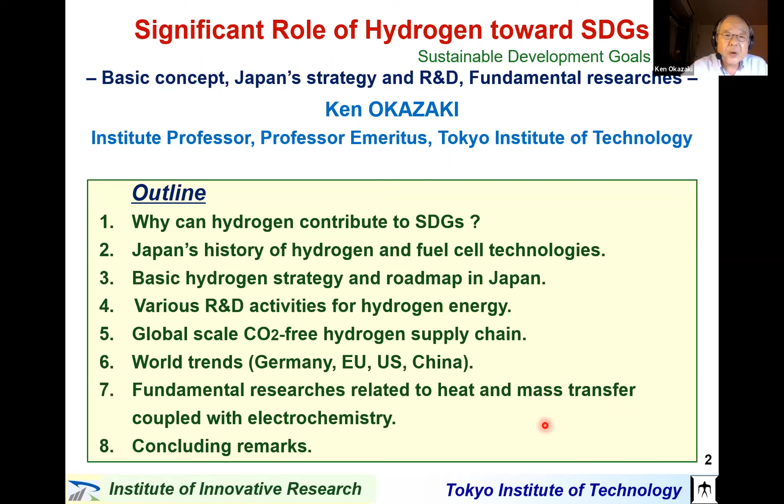Hydrogen is secondary energy and can be produced from various different kinds of energy resources, including domestic fuels, overseas unused energy, and renewable energies. Especially renewable energy is the most important to produce hydrogen in the future. Hydrogen is transported to the demand side and used to realize CO2-free industry and CO2-free mobility.

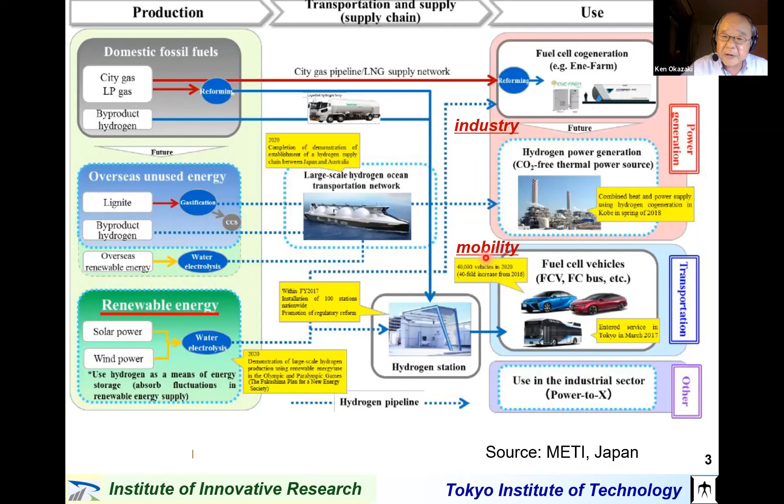This slide shows the situation of renewable energy in Japan. At present, the percentage of renewable energy is only 12% in Japan, but we have to increase this percentage to 22-24% by 2030, including solar power, wind power, biomass, and geothermal. Especially in Japan, solar power, PV, will play a very important role.

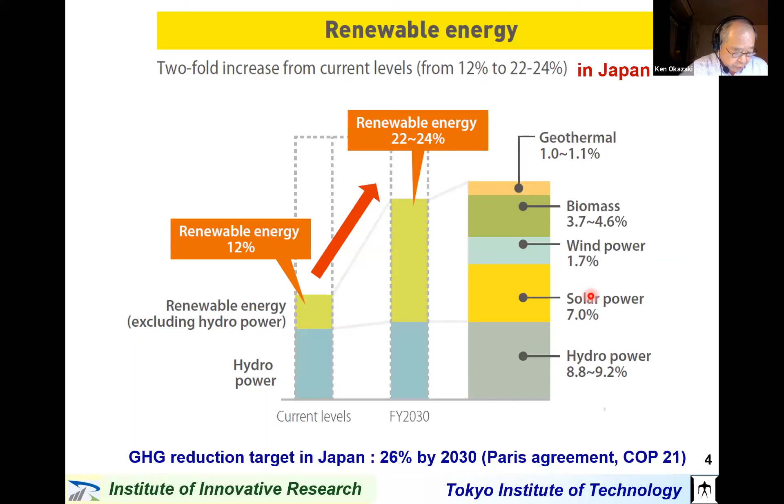Here we discuss why hydrogen now. Because of clean energy, flexible energy carrier, and long experience in hydrogen development in Japan. But when we discuss energy security and global environment, hydrogen should have a large, massive contribution.

Another importance of hydrogen is that it can enhance the introduction of more and more renewable energies, because renewable energy, especially natural energy, has very large fluctuations from seconds, minutes, hours to seasons. So for load leveling, hydrogen will play a very important role.

Another case is large electricity production above demand. In this case, hydrogen can store much amount of energy for the long term. Batteries may have the same role, but energy storage capacity and duration time are much smaller than hydrogen, as shown in the next slide.

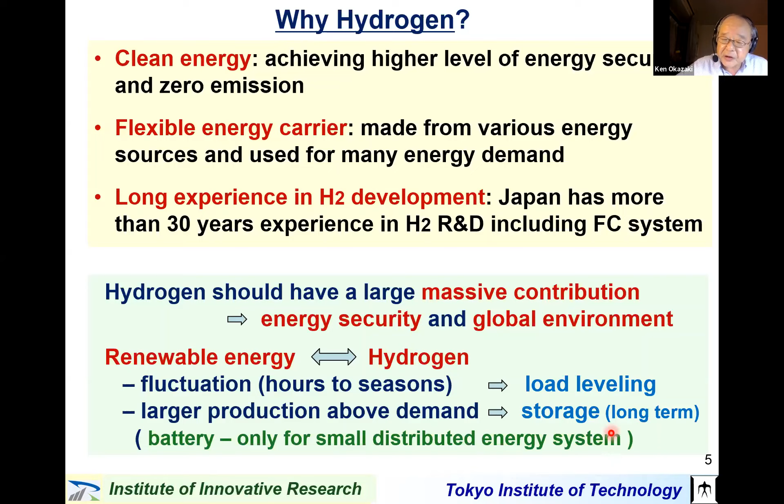As shown here, hydrogen has a very large capacity corresponding to 1 gigawatt and can store energy for a long time corresponding to minutes, hours, days, weeks, and even seasons. So hydrogen will play a very important role when we introduce more and more fluctuating renewable energies.

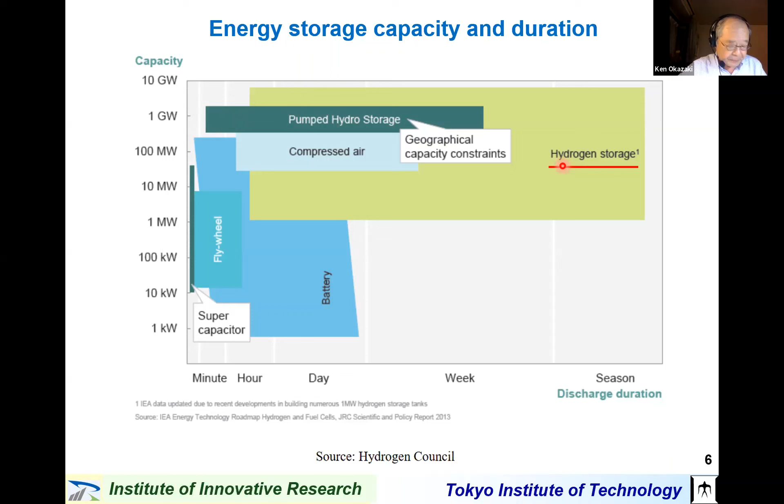Here I'll mention Japan's history of R&D in hydrogen and fuel cell technologies. We have more than 30 years of experience in hydrogen and fuel cell technologies.

In 2009, we introduced the household fuel cell, PEFC, and in 2011, the household fuel cell, SOFC. In 2013, we introduced hydrogen refueling stations and dissemination of hydrogen stations. As you know well, the actual commercialized fuel cell vehicle sales started in 2014. And now the global hydrogen supply chain and hydrogen power generation are ongoing, including various demonstrations as explained later.

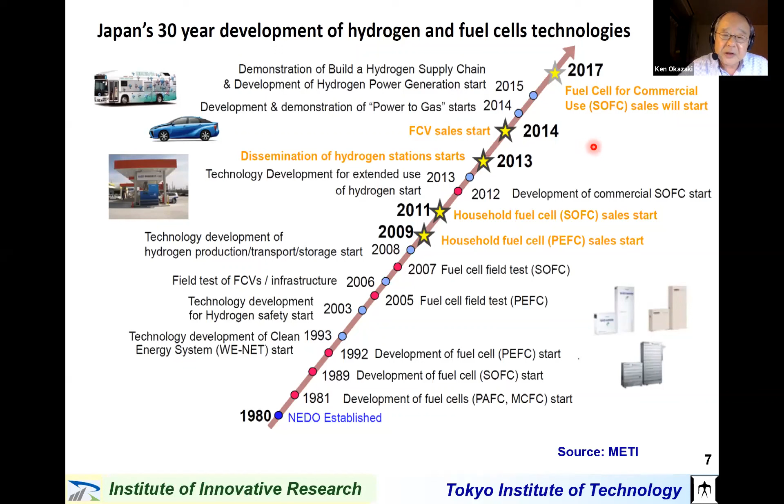As for national strategies, the basic hydrogen strategy was established about 2.5 years ago, in December 2017, declared by the Prime Minister.

Among them, hydrogen cost is the most important. The target shown here is $3 per kilogram hydrogen by 2030, down to $2 per kilogram hydrogen by 2050. To realize that, large-scale hydrogen supply chains and massive usage of hydrogen in mobility, power generation, and industry in general are needed.

Key technologies to be developed are shown here. In production, the electrolyzer system is quite important, and for transportation, which kind of energy carrier should be used matters. In the utilization part, on the demand side, fuel cells for mobility and power generation, and hydrogen-fired power generation will be quite important in the future.

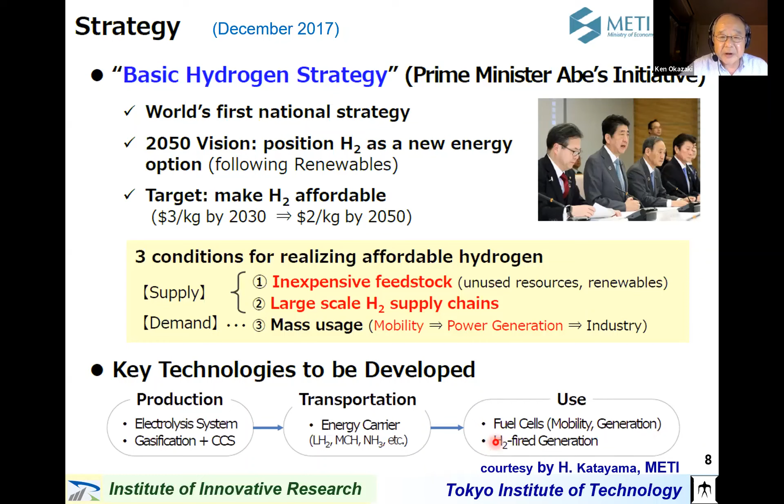This is the scenario for the basic hydrogen strategy. As for hydrogen volume, this is the present picture, and this is the target by 2030. The target for hydrogen volume in 2030 is about 300,000 tons per year, and the cost should be $3 per kilogram hydrogen. The power generation cost should be 17 Japanese yen per kilowatt hour, which corresponds to 15 cents per kilowatt hour. For mobility, 900 hydrogen stations should be introduced, and 800,000 fuel cell vehicles should be introduced.

800,000 fuel cell vehicles should be introduced, and utilization of fuel cells for households in private houses should be 5 million units by 2030. So we are now going on to realize such a target.

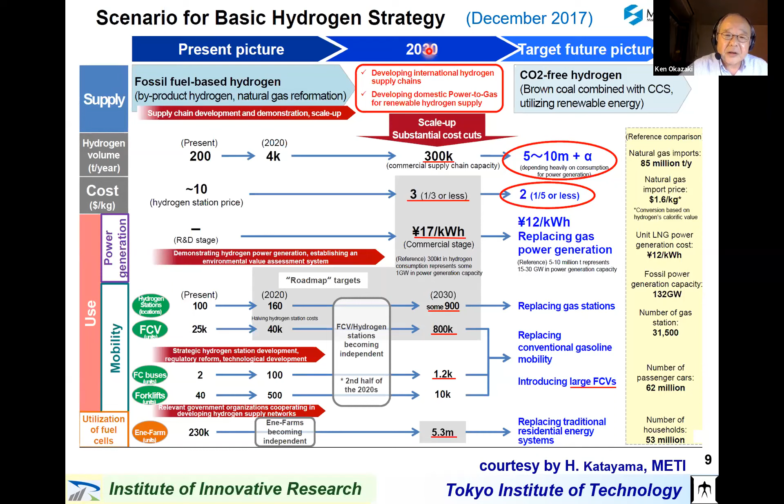By the way, what is the definition of hydrogen society? I myself said about 3 or 4 years ago: it is a society where hydrogen used as a secondary energy accounts for over 20% of all energy consumption, including industrial applications, and hydrogen quantitatively and sufficiently contributes to energy security and a carbon neutral society. These are the two major issues to realize such a hydrogen society.

One is the drastic expansion of demand, including fuel cell vehicles, residential fuel cell cogeneration units, and hydrogen electrical power generation. And for that demand, we have to realize the supply chain for a large amount of hydrogen. One is CO2-free hydrogen derived from domestic renewable energies through P2G, and also CO2-free hydrogen from unused energy from overseas. So increase of demand and supply, both are quite important.

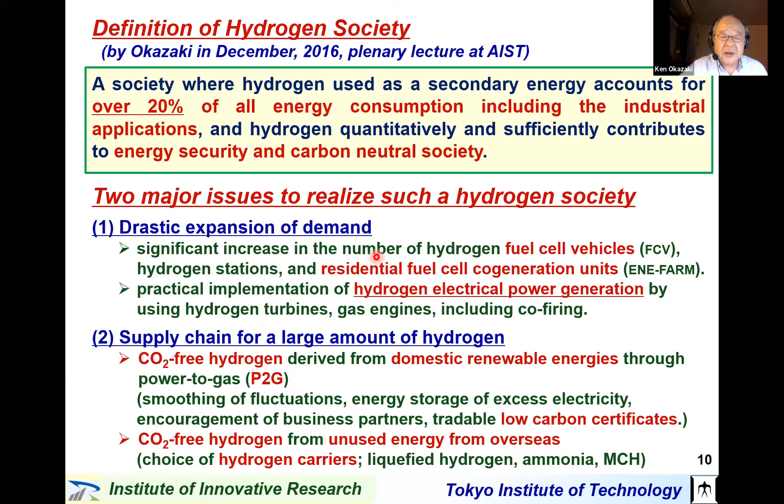This 20% value was supported by the Hydrogen Council, following my proposal.

Maybe all of you know well, but I'll show briefly the principle of the fuel cell like this. This is a membrane, and this is the fuel cell, and this is MEA, membrane electrode assembly, and fuel cell stack. More than 300 fuel cell MEA gathered in one stack will be packed in the fuel cell stack and installed in the car.

This is a high pressure hydrogen tank. Pressure is 70 megapascal, corresponding to 700 atmospheric pressure. Such a high pressure hydrogen tank is just below the rear seat.

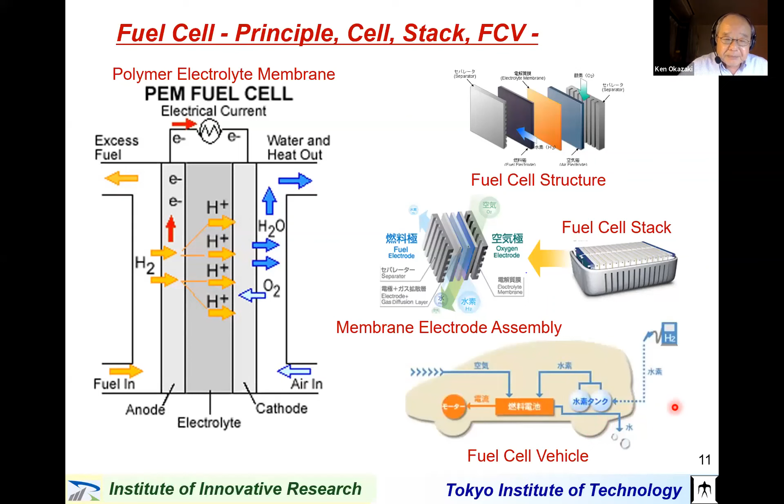Many people may be interested in the comparison between battery EV and FC EV, and between hybrid EV and plug-in hybrid EV here. FCV, fuel cell vehicle, has an advantage especially for large vehicles, including buses and trucks, considering cruising distance and charging time. For the fuel cell vehicle, hydrogen refueling time is only 3 minutes. Much longer time is necessary for the charging of battery EV.

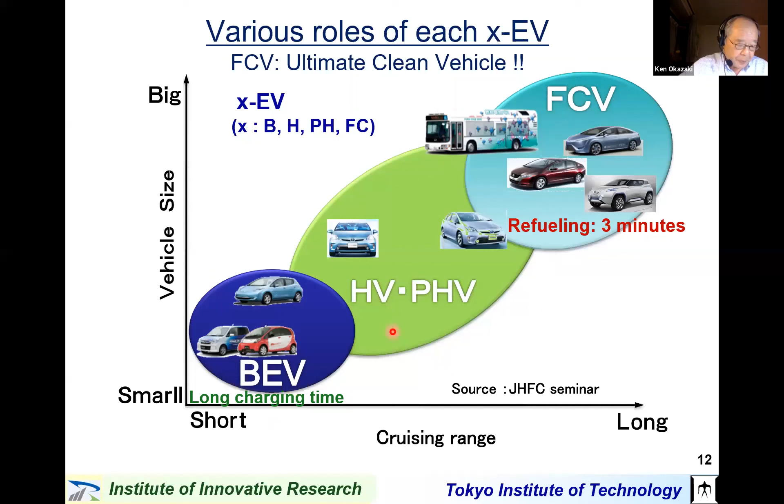This slide shows the status and target of fuel cell vehicles in Japan. I already explained the target of introducing fuel cell vehicles is 800,000 by 2030. By 2020, we tried to introduce 40,000 fuel cell vehicles, but actually, can you guess? Actually, only 10,000 fuel cell vehicles were introduced, behind our target. Fuel cell buses are also introduced into public services.

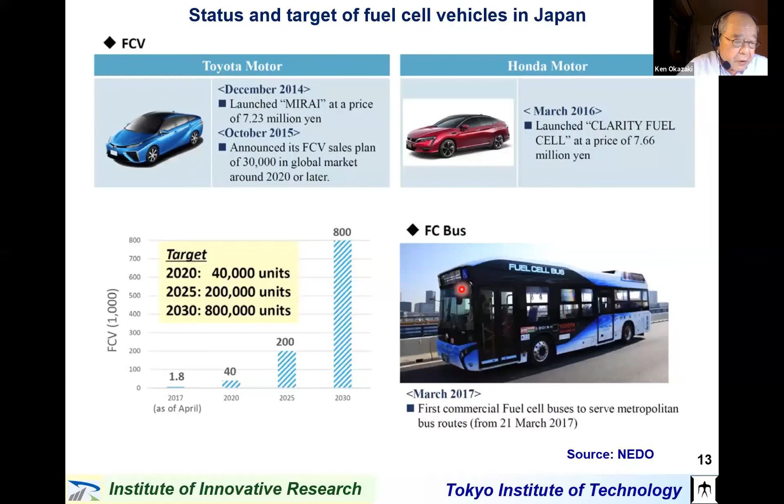Another important system to use hydrogen is the stationary fuel cell cogeneration system. City gas is reformed to form hydrogen and CO2, and hydrogen is used to produce electricity and heat or hot water through the fuel cell system, supplied to the houses.

Now we have 280,000 units already introduced into private houses, including my house. I introduced this kind of system in my house more than 7 years ago.

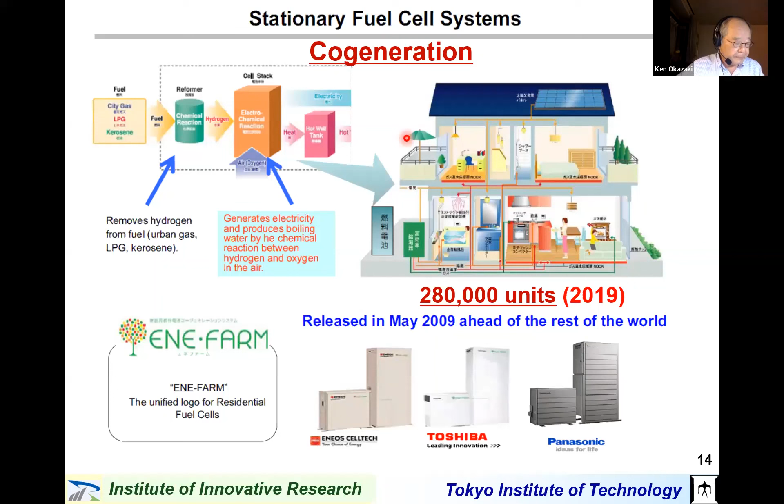This is an ongoing project. As for mobility, I already explained, but as for hydrogen power generation, the hydrogen cogeneration demonstration project was successfully done 2 years ago in the Kobe area using a hydrogen gas turbine system of 1.7 megawatt. This is, of course, a cogeneration system, and electricity is supplied, and heat is also supplied to surrounding hospitals, athletic gyms, and others.

The other big project is to develop a large-scale hydrogen combustion gas turbine. This is an example to develop the burner system.

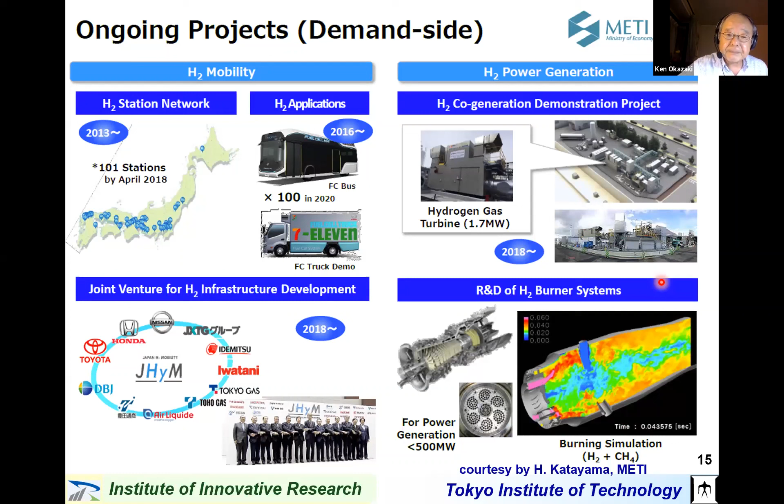As you know, Japan has almost no energy resources. So to supply a large amount of hydrogen, we in Japan are developing global scale hydrogen supply chains. Two of these have almost reached the demonstration stage.

One is using associated gas reformed to form hydrogen to make MCH, methylcyclohexane, transported to Japan. The other big project is using lignite from Victoria state in Australia to make hydrogen, liquefy it, and then transport it to Japan by liquid hydrogen tanker.

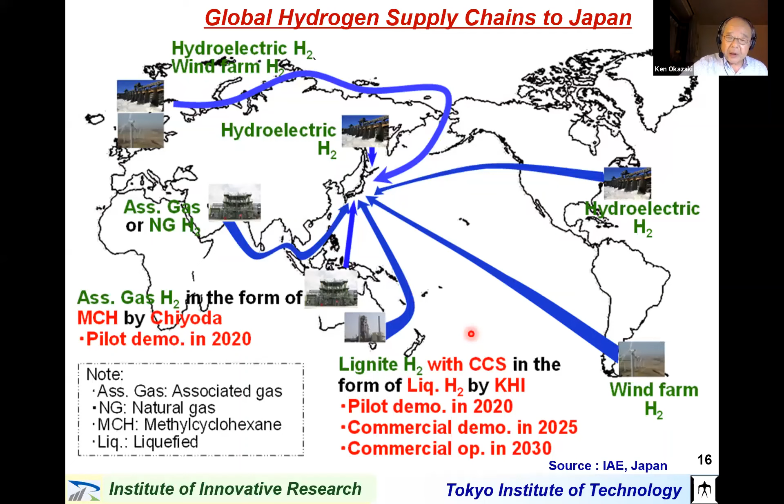I'd like to explain a little more about the ongoing project. This is the Brunei project I explained, and this is the Japan-Australia pilot project. Brown coal is gasified to form hydrogen and CO2. The CO2 is transferred to the CCS process, meaning carbon capture and storage under the ground. The liquefied hydrogen is transported to Japan by hydrogen tanker to the demand side. So in this case, we can realize no CO2 emissions, even though we use coal.

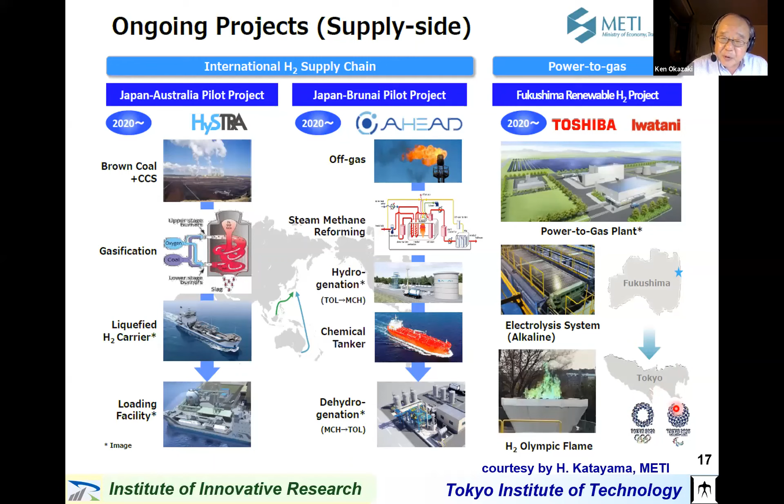Another big domestic project in Japan is the Fukushima Renewable Hydrogen Project, using PV, photovoltaic power generation, to form hydrogen. Electricity is used to make hydrogen through an electrolyzer, and the hydrogen was planned to be transported to the Tokyo area for use in the Tokyo Olympic Games, but that is postponed or cancelled now. The next slide shows a diagram of this kind of system.

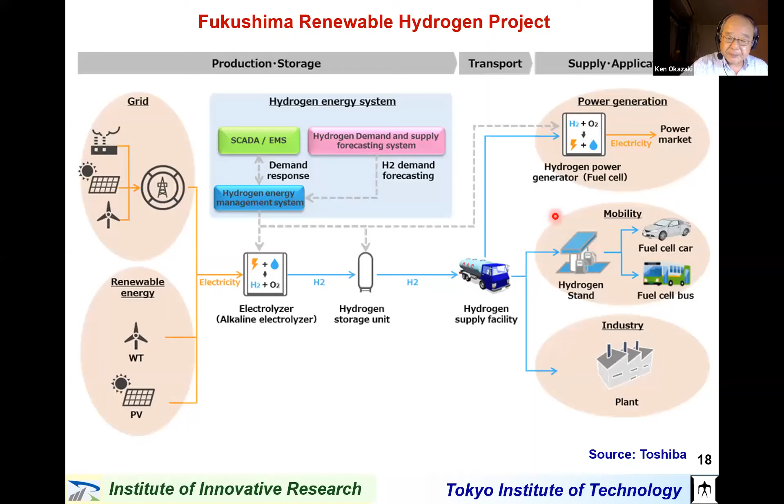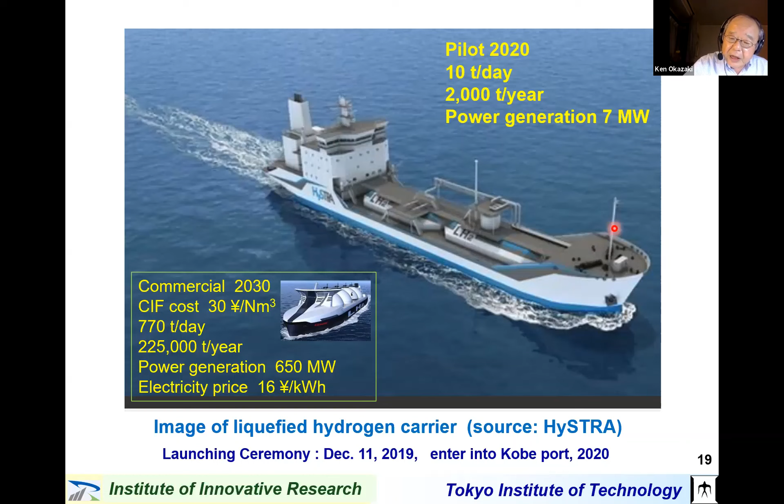This slide shows the pilot scale liquid hydrogen tanker like this, and the commercialized scale shown here by 2030. But this kind of shape is not a dream. We actually realize this kind of liquid hydrogen tanker, the world's first liquefied hydrogen carrier, so-called Suiso Frontier. The launching ceremony was actually held in December last year, only half a year ago. So we have come to this kind of actual stage.

At present, hydrogen still plays only a small part in the energy sector. To expand hydrogen utilization, various factors are necessary, such as large-scale hydrogen supply from abroad, and large-scale utilization of hydrogen in various industrial sectors, including electrical power generation, oil complex, industrial applications, city utility, transportation, hydrogen stations, cogeneration, and zero-emission buildings.

For that, these kinds of challenges are definitely necessary, including big investment and cost-down of hydrogen price. To accelerate such implementation, this kind of trinity among policymaker, industry, and the financial sectors is necessary.

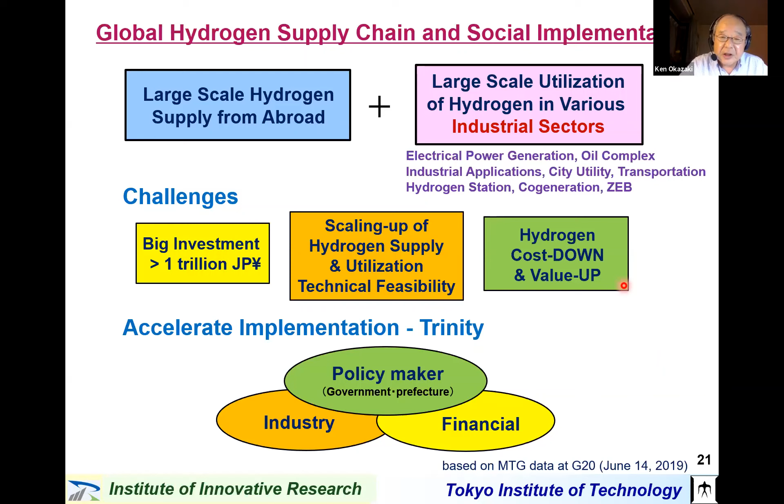In Aichi Prefecture, this kind of initiative is actually being promoted through a collaboration of Aichi Prefecture and energy companies, as shown here. This is the Aichi low-carbon hydrogen supply chain 2030 vision, by the collaboration among Aichi Prefecture, energy companies, and also big Toyota.

Headquarters of Toyota is in Aichi Prefecture. In the first stage, the target is to expand renewable energy-based low-carbon hydrogen supply chains using the existing infrastructure like this. So in the first stage, we already realized sustainable development of low-carbon hydrogen supply chains, using biogas transported to the usual existing city gas pipelines, to the Toyota factories, and used to supply hydrogen to the forklifts.

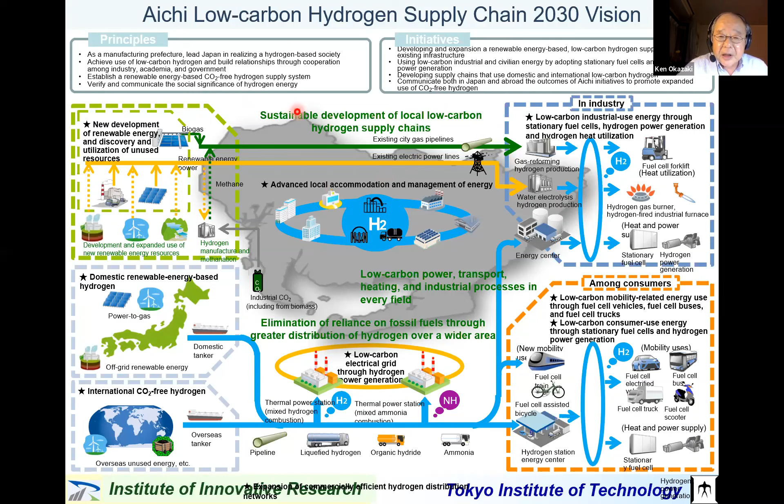In the second stage, low-carbon power, transport, heating, and industrial processes in every field. And finally, the elimination of reliance on fossil fuels through greater distribution of hydrogen over wide areas. We are now at this stage, and I am also chair of this project.

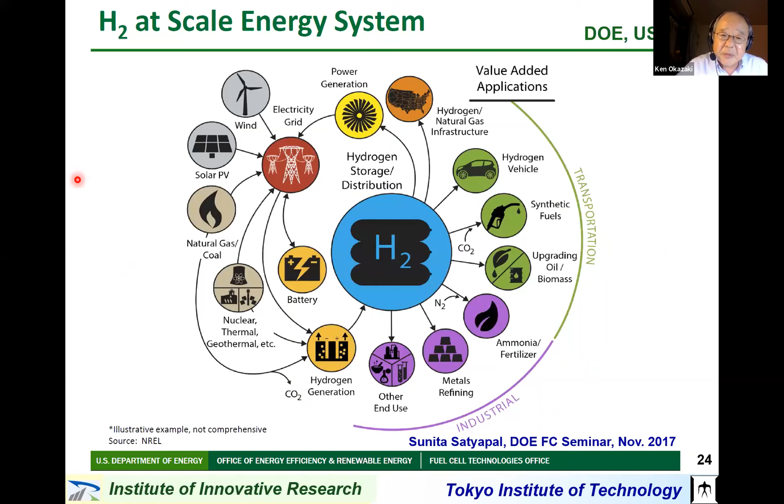As for the United States, there's the famous national project so-called Hydrogen at Scale Energy System, operated by the DOE. Arun was one of the panelists, and was number 2 or number 3 of DOE before. The important thing is matching among energy sectors, electrical grid, and hydrogen generation, storage, distribution, and utilization, including industrial applications. The concept is almost similar to others.

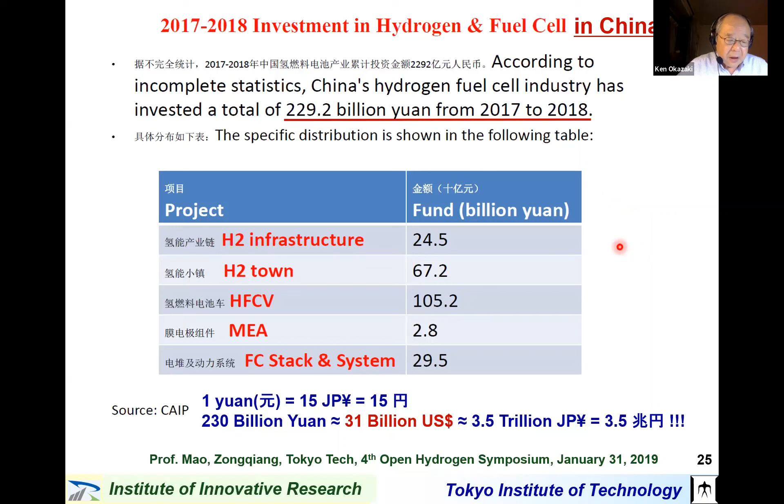Finally, I'd like to mention the fundamental research related to heat and mass transfer, including fuel cells and electrolyzers. I don't have enough time to explain the details. Fuel cell and electrolyzer, hydrogen-oxygen combustion and turbine systems, distributed cooperative energy systems, hydrogen carrier and supply systems including the physical properties of liquid hydrogen, including ortho-para transitions -- I will mention about this later, I think -- and many others, including fundamental physics, chemistry, thermodynamics, are very important research subjects that still play a very important role in realizing the hydrogen society.

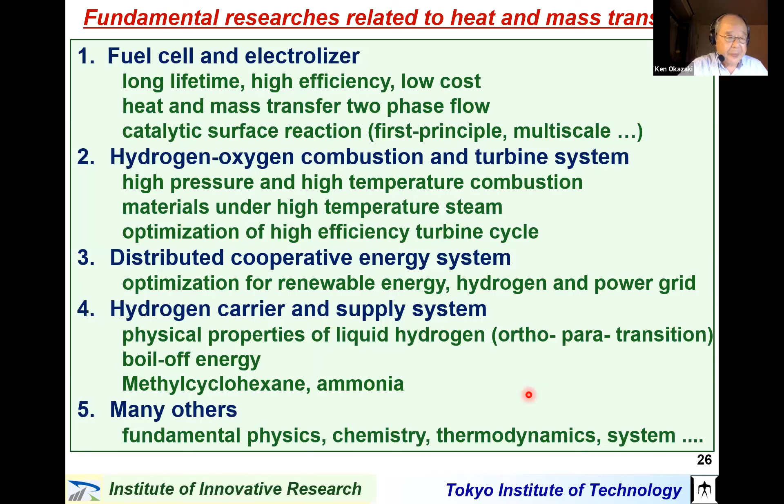Some examples we did at Tokyo Tech are shown here. This slide shows the Tokyo Tech interdisciplinary research project on PEFC, polymer electrolyte fuel cells, with higher energy efficiency and durability, in collaboration with mechanical engineering, electrochemistry, catalytic chemistry, and polymer science. So we did this kind of collaboration among professors of different research fields and different backgrounds.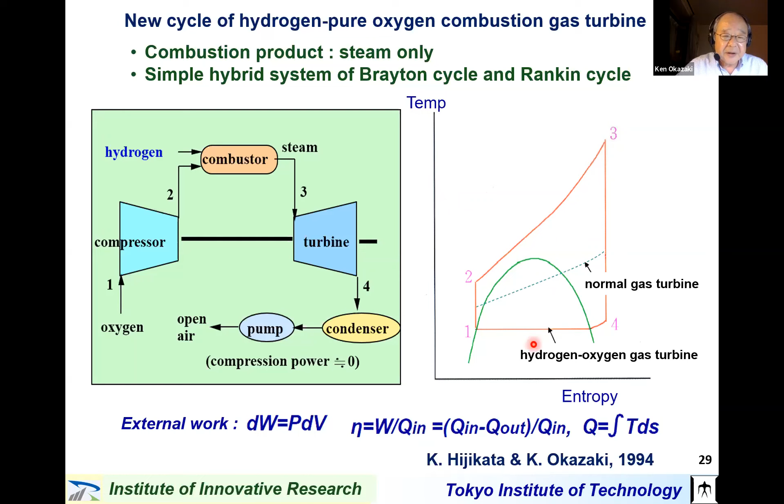That's all for my presentation. Thank you very much for your kind attention. Thank you.

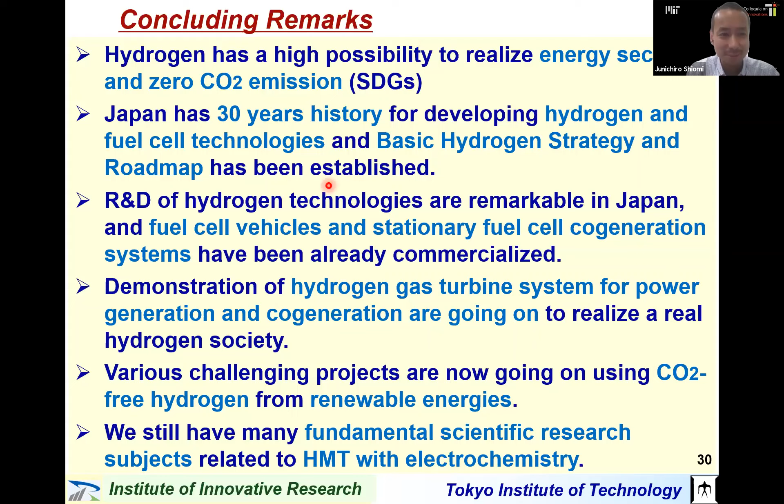Thank you very much, Professor Ken Okazaki, that was a really great talk. So now we want to move on to discussion, but before doing so I'd like to suggest doing a poll. Actually I was supposed to do it before Ken's talk, which I forgot to do, so I'm going to do it now. That's okay, sorry about that.

So here's the poll. Okay, do you see this? I guess everybody sees it, or maybe not. Do you see it? Yeah, okay, people started voting, so I think you see it.

At present, hydrogen plays only a small role in the energy sector. What is the most important factor for wide use of hydrogen energy?

There was actually a question related to this poll, so I think this poll is quite timely. Yes, yes.

Okay, so we've already reached half, 50% of people already answered. Let's give it 30 more seconds, or maybe 15. Okay, thank you very much. We're going to end the poll here and show you the result.